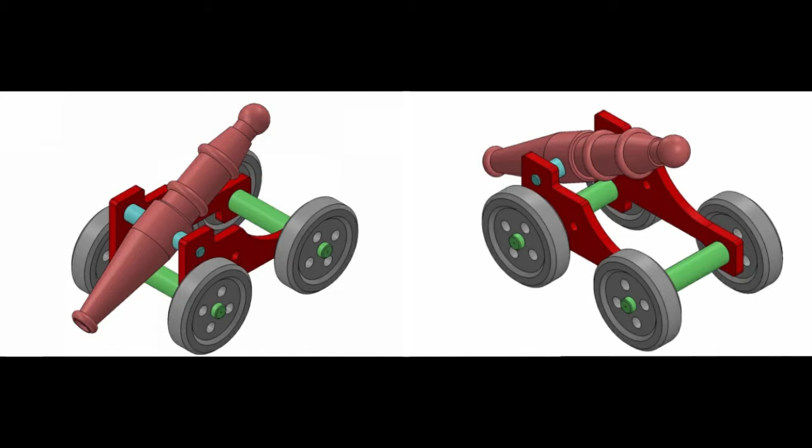In this video tutorial, we're going to be recreating this mortar with wheel plate from cadexpert.com to Solidworks 2013. This is actually divided into 5 parts. Here are the parts, I'm going to flash it to the screen.

We're going to be doing each part one at a time, and once we've completed all the parts we need, we're going to assemble it into a mortar with wheel.

So first thing is I'm going to open a new Solidworks document, and then I'm going to change the unit to millimeter since that's the unit we're going to be using in this plate.

Now I'm going to sketch a 78 diameter circle, and then extrude it by 110 millimeter.

And I'm going to sketch another circle with 82 diameter, and then extrude it by 90 millimeter.

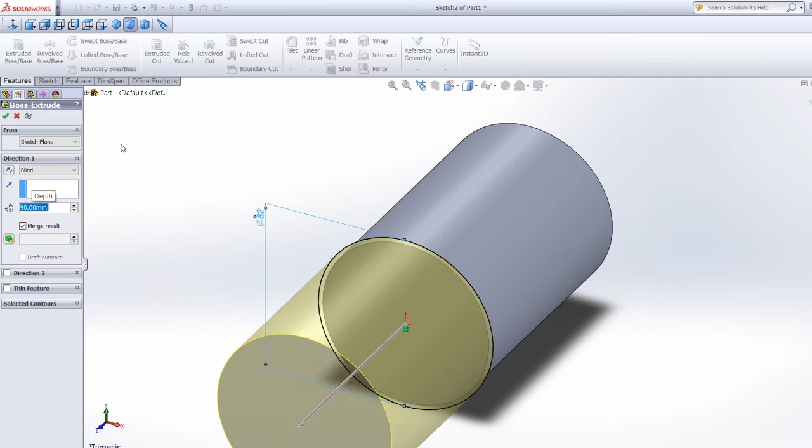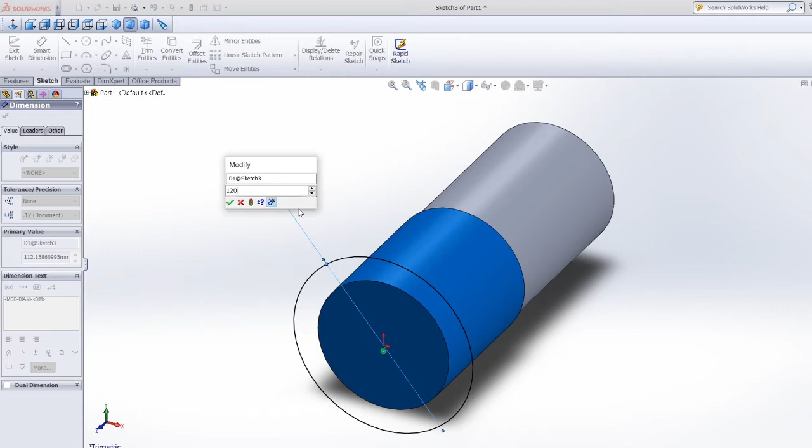Sketch another circle again with 120 diameter, and extrude it by 440 millimeter.

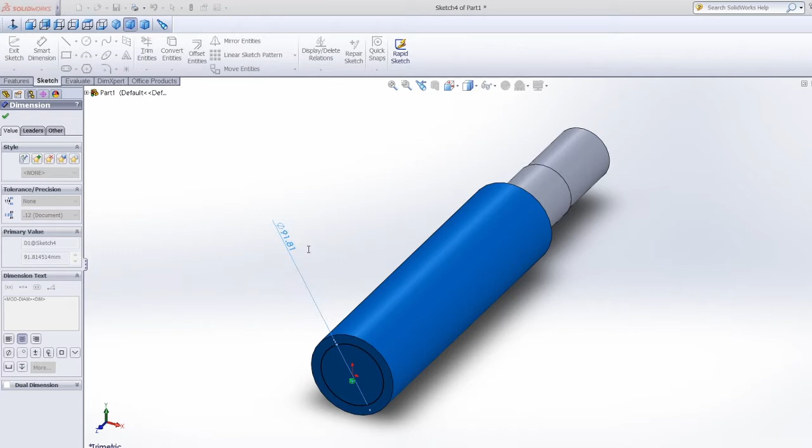Then after that, we're just going to copy what we did on the other side. Make another 82 diameter circle again, and extrude it by 90 millimeter.

And make another 78 diameter circle again, and extrude it by 110 millimeter.

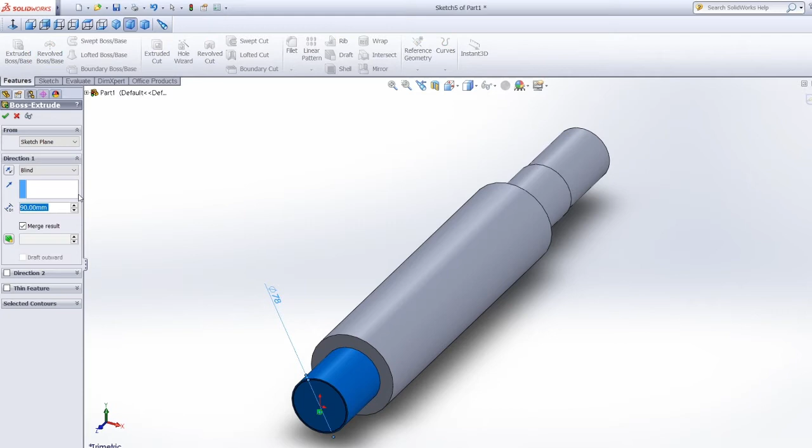Now we're just going to use a chamfer with 5 millimeter distance from both ends of this object.

Then lastly, we're going to sketch a 7.5 diameter circle from both end surfaces of the object, and extrude cut it to 6.25 millimeter.

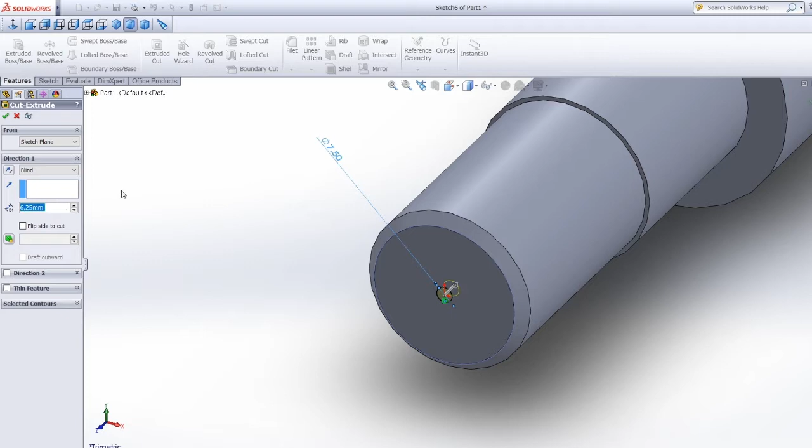Now we just have to change the color of the object so we won't get confused once we assemble it.

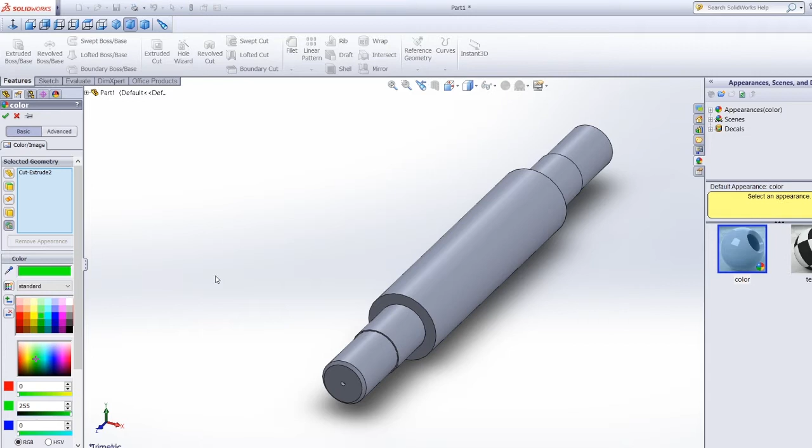Now we're done with the first part. We're just going to save it and use part 1 as the file name, and make sure you use a new folder so it would be less hassle once we start to assemble.

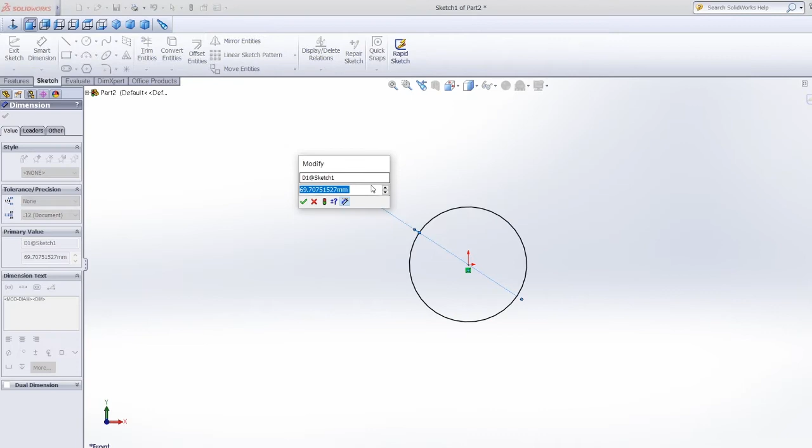Now this is the second part. I'm going to be sketching a 60 diameter circle, and extrude it to 55 millimeter.

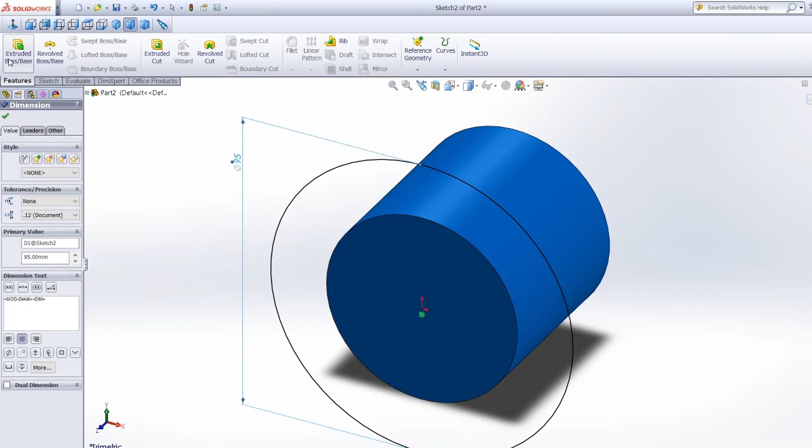And then sketch another circle with 95 diameter, and extrude it by 440 millimeter.

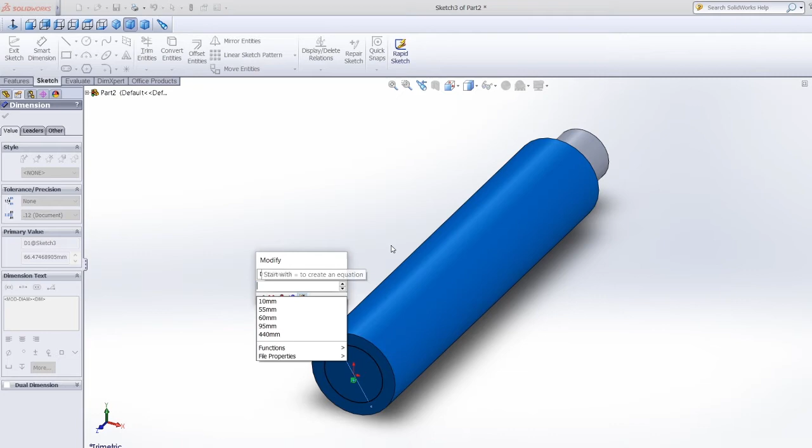And after that, we're just going to copy what we did on the other side again. Make a 60 diameter circle, and extrude it to 55 millimeter.

And we're going to use chamfer again from both ends of the object with 5 millimeter distance.

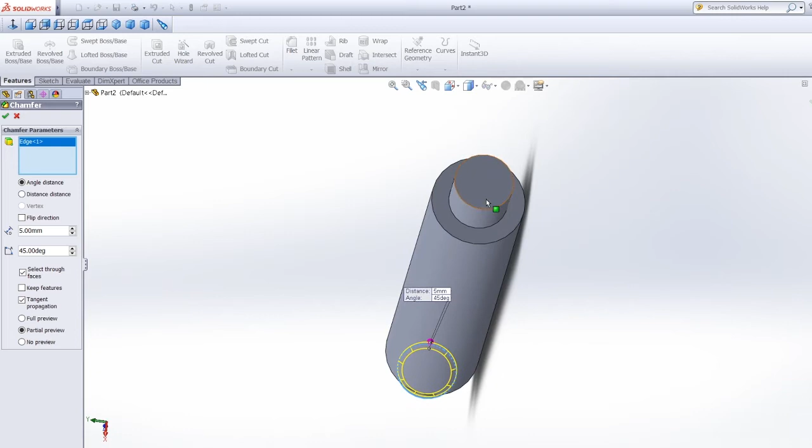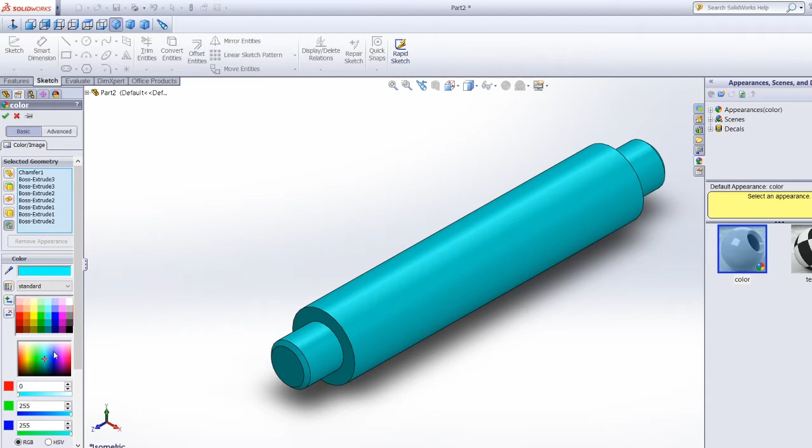And now we're pretty much done with the second part. All we have to do is change the color again, and save it under the file name part 2.

Now this is the third part. Let's start by sketching a 200 millimeter line.

And then a 200 millimeter line again downward, and another 200 millimeter line again from right to left, and then a 100 millimeter line upward.

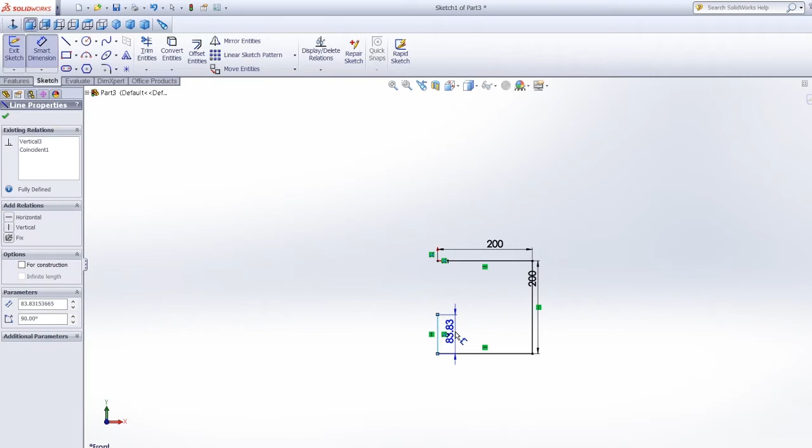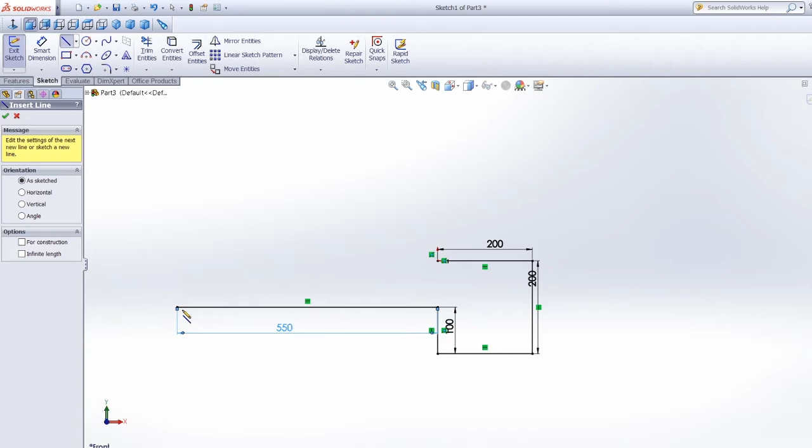Then from this point, make a 550 millimeter line leftward, and then from your end point here, make a 100 millimeter line downward.

Then make a 200 millimeter line again leftward. From your end point here, make a 500 millimeter line upward.

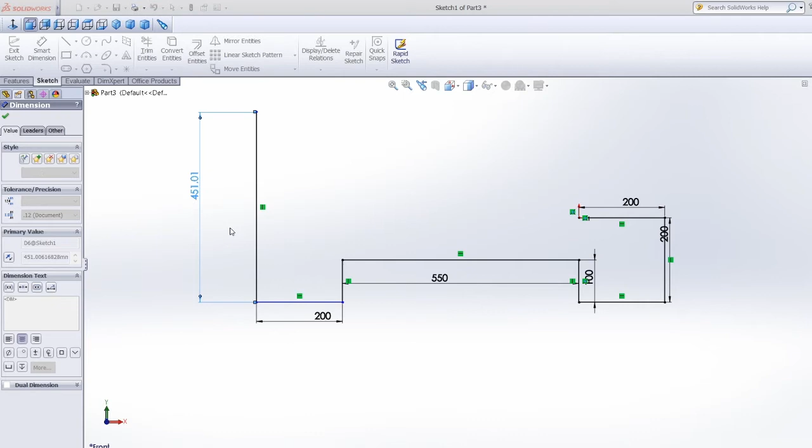Then from here, we just have to copy the measurement we used on the lower part, and from this point, make another 200 millimeter line again rightward.

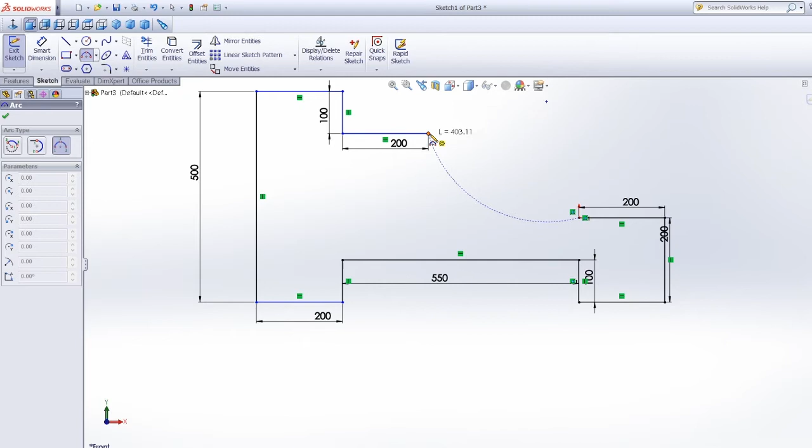And then I'm going to be using a tangent arc, 3-point arc rather. And then with smart dimension, I'm going to put the radius into 380.

Now we're going to locate the center of this part, and we're going to make an 80 diameter circle, and also a 60 diameter circle from the center here, and also another 80 diameter circle in this center.

Now we're going to draw a 150 millimeter line from here upward, and a 250 millimeter line leftward.

Then from this endpoint, I'm going to sketch a 50 diameter circle. Then I'm just going to delete these measurements.

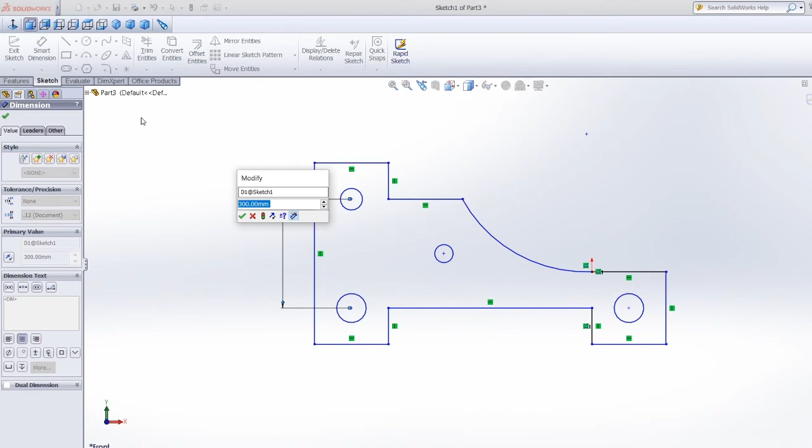Now to check if we have the proper measurement, the distance from this 80 diameter circle to this 60 diameter circle is 300. Then from both, this 80 diameter circle is 750. So we had both distances right.

Now we're going to extrude it, and we're going to extrude it by 50 millimeter.

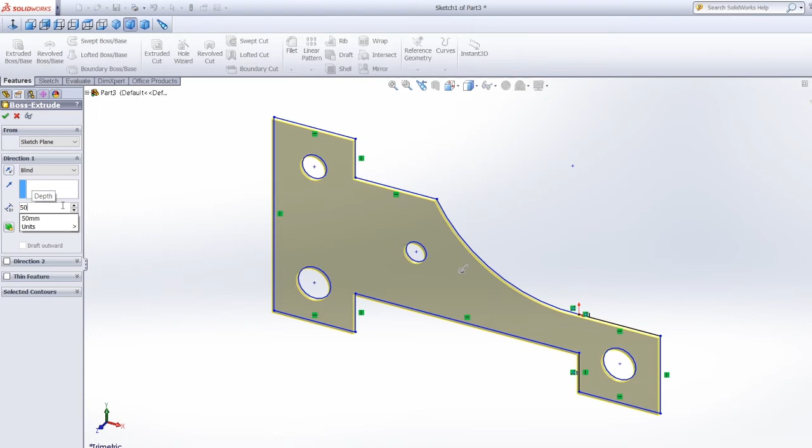Now we're going to use fillet with 20 millimeter radius, and we're going to apply it to all the sides.

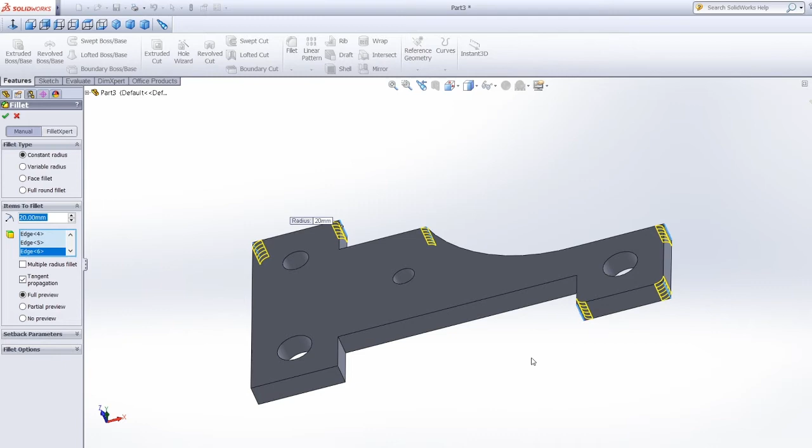Then another fillet with 40 millimeter radius, apply it to both these sides.

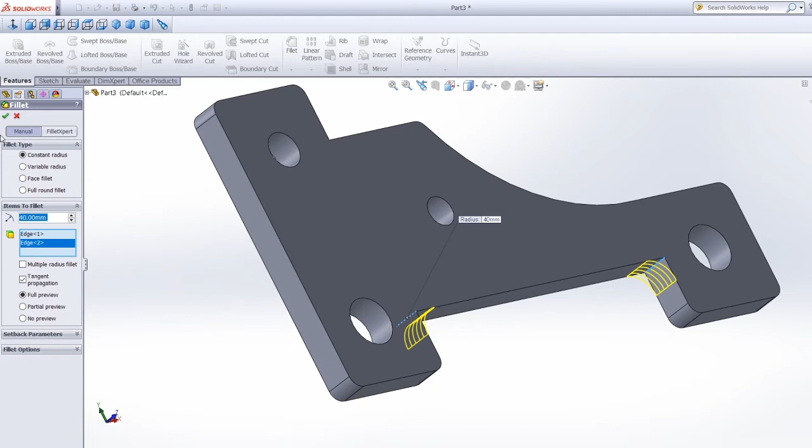Now change the color appearance, and we're done. Save it under the file name part 3.

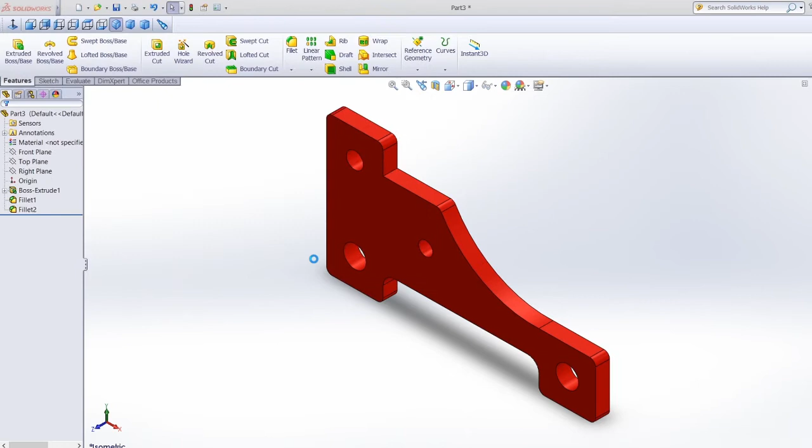Now this is the fourth part. I'm going to start by sketching a 500 diameter circle, and extrude it to 130 millimeter.

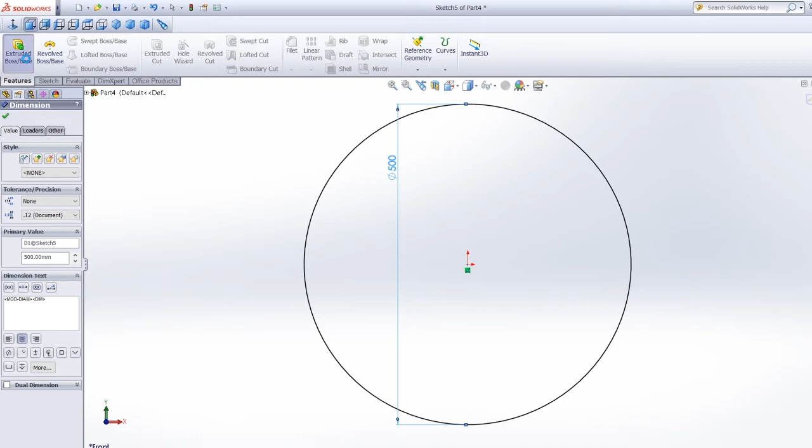After that, we're going to use chamfer with 20 millimeter distance and 45-degree angle from both the front and the back surface.

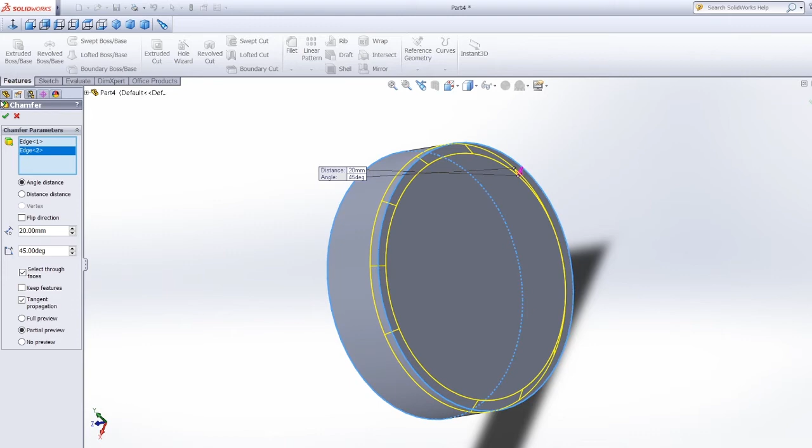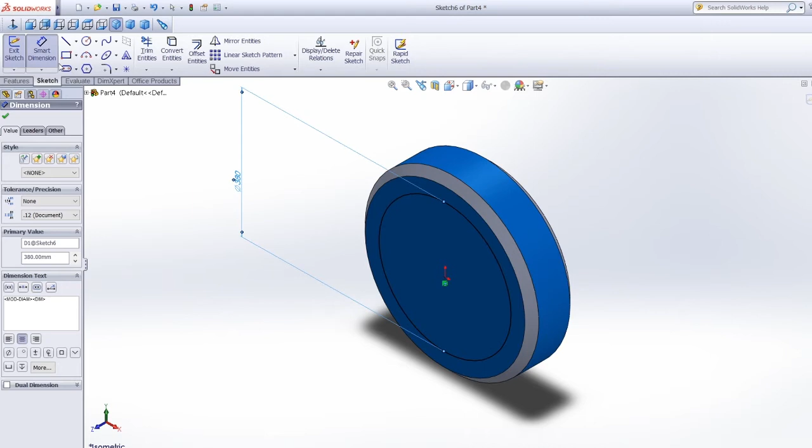And now going back to the front side, we're going to sketch a 380 diameter circle here, and then extrude cut it to 20 millimeter.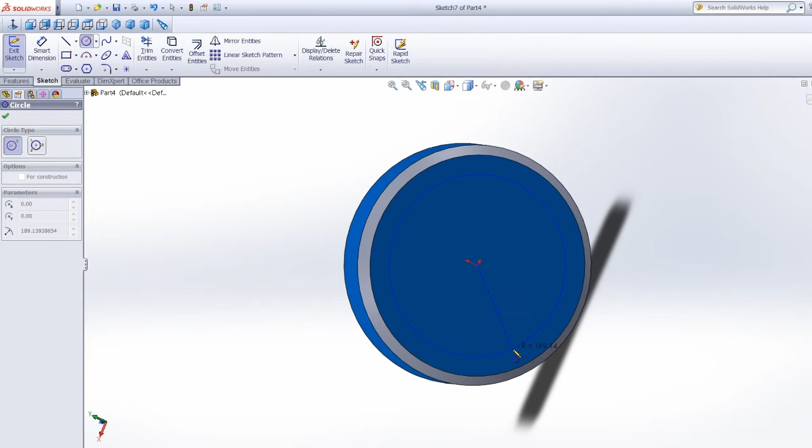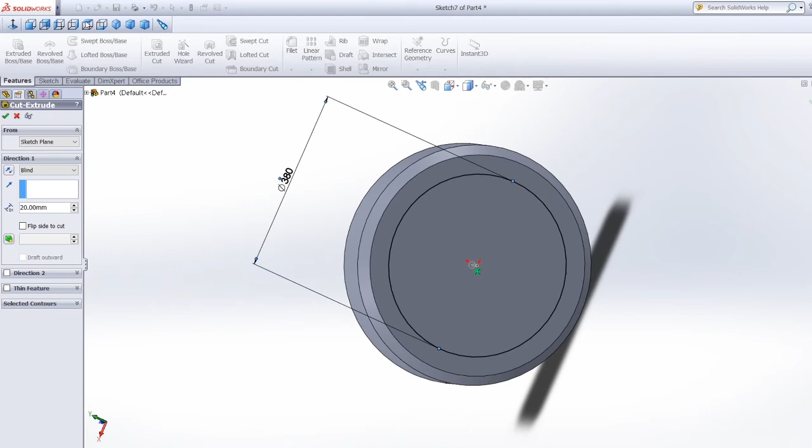Then we're just going to do the same thing here at the back. Now use chamfer again with 20 millimeter distance and 45-degree angle from both the front and the back.

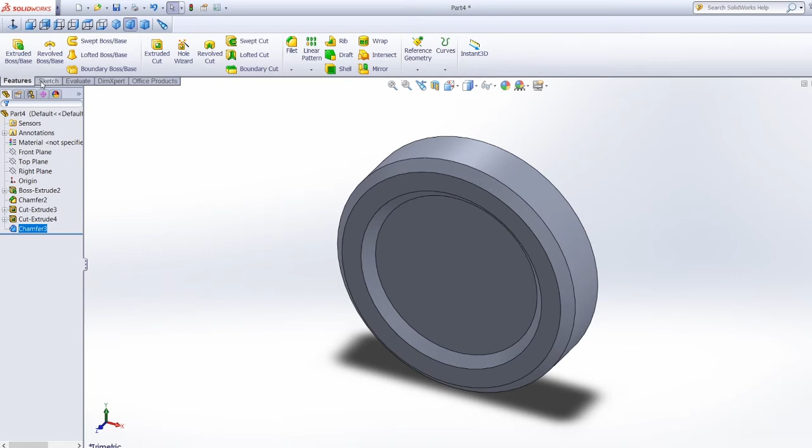Then from the front view, we're going to sketch a 200 diameter circle, and from the center, make a line and connect it to the right endpoint.

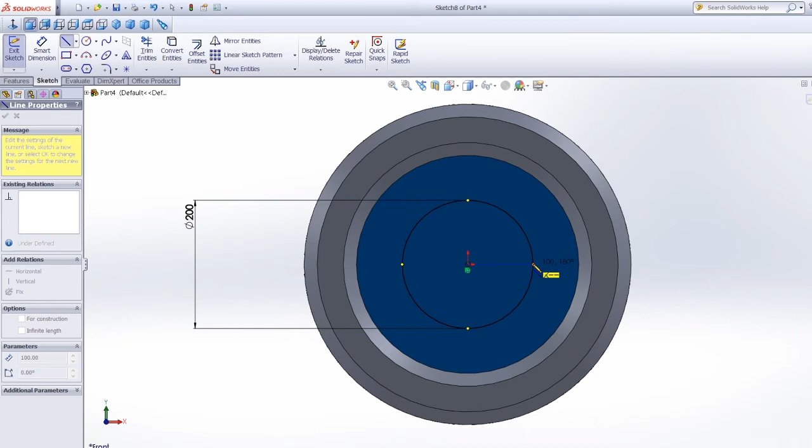Then after that, click the arrow button beside the linear sketch pattern and make it a circular sketch pattern, and then change the number of instances to 4.

And then start sketching circles using the lines as the reference. After that, click the circles that you've made.

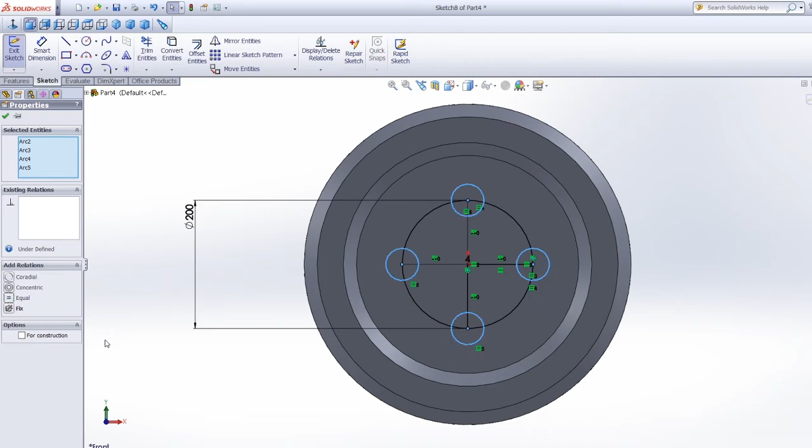And click this equal button, then use Smart Dimension to fix the diameter to 62 mm.

Then I'm just going to delete all these guidelines that I've used, and I'm going to sketch a 78 diameter circle here at the center.

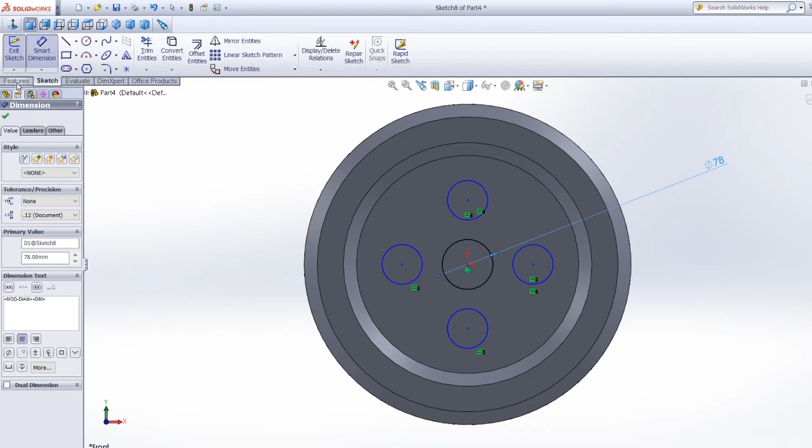Then lastly, we're going to extrude cut it by 90 mm.

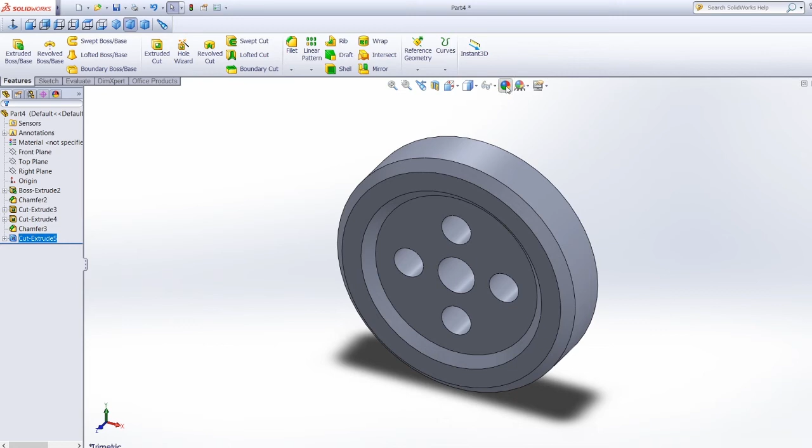Now change the color appearance. And save it under the file name Part 4.

Now this is the last part we're going to be doing before assembling it. I'm going to start by sketching a 1390 mm line. This would serve as our baseline. Then from this point, I'm going to be sketching a 47.50 mm line upward. From here, make a 4 mm line to serve as our distance. Then using that distance, sketch a 55 mm line from the base.

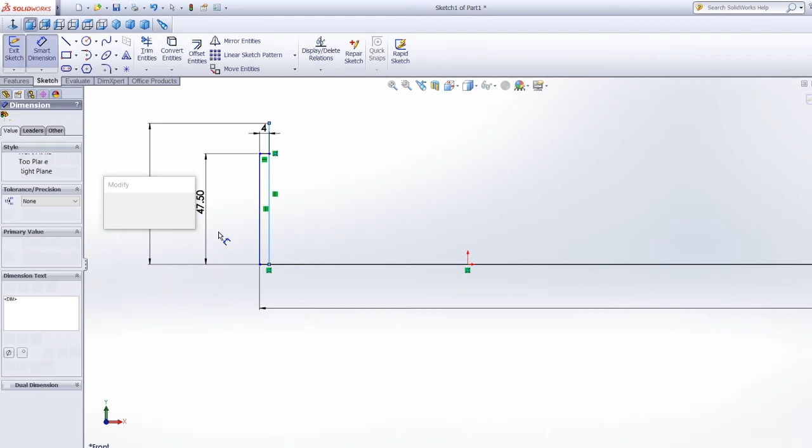By the way, I'm sketching guidelines here on the top instead of the lines at the bottom because I get confused easily. And I purposely did the 1390 mm line first because I just want to make sure that the length of my object is accurate all throughout the process.

Now I'm just going to delete this 4 mm line and replace it with 16 mm. This would serve as our distance when we draw a 32 mm line from the baseline. Now make a line connecting this 47.50 mm line to the 32 mm line.

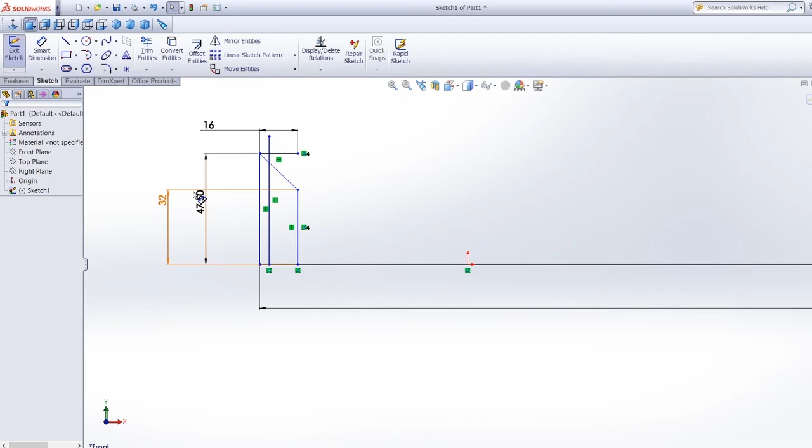I'm just going to delete all this dimension and also trim the lines that are not needed. Then from this point, sketch a tangent arc and fix the radius to 25.

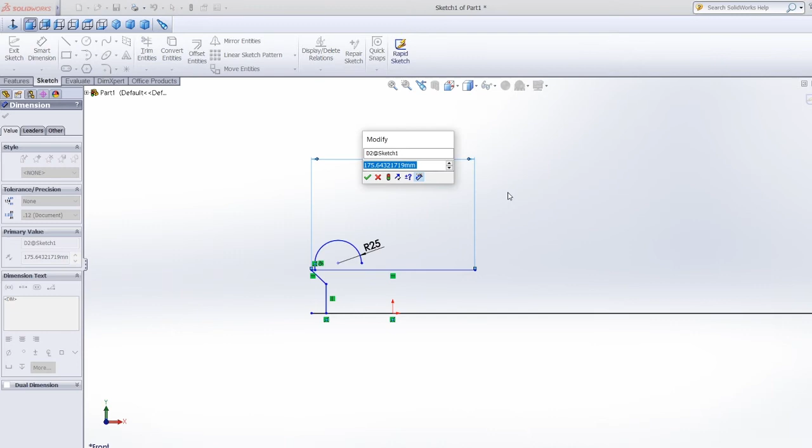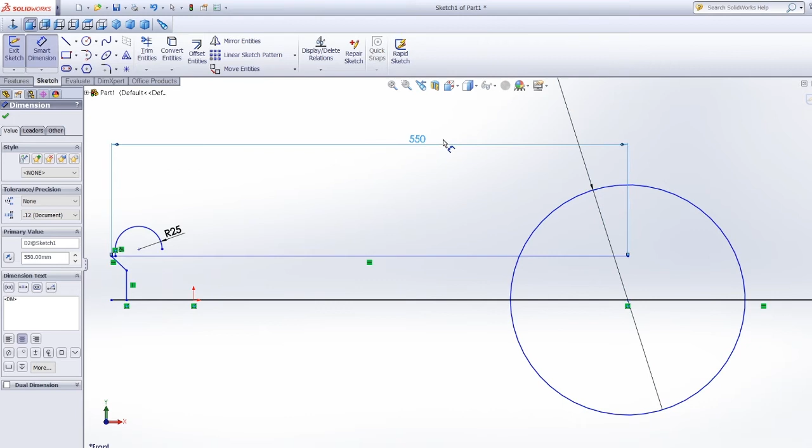Now we're going to make a 550 mm line. This would serve as our distance. Then from the baseline, make a 250 diameter circle. Then we're going to sketch a line connecting this 25 radius arc to this 250 diameter circle. After that, we can delete the circle already.

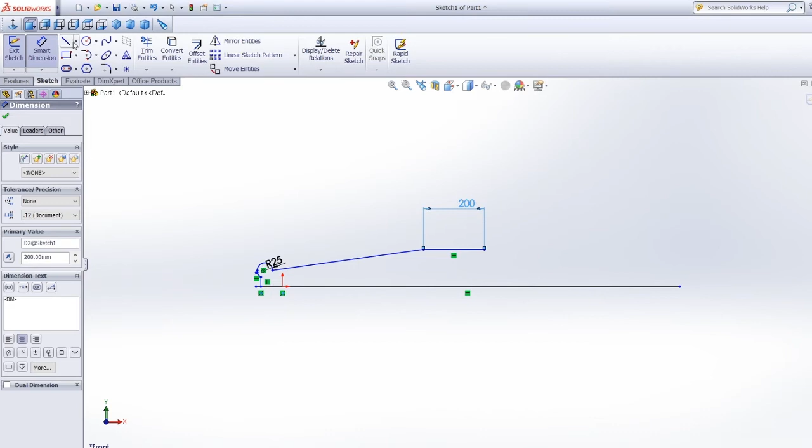Then from this point, make a 200 millimeter line. And a 10 millimeter line downward. Then an 80 millimeter line rightward.

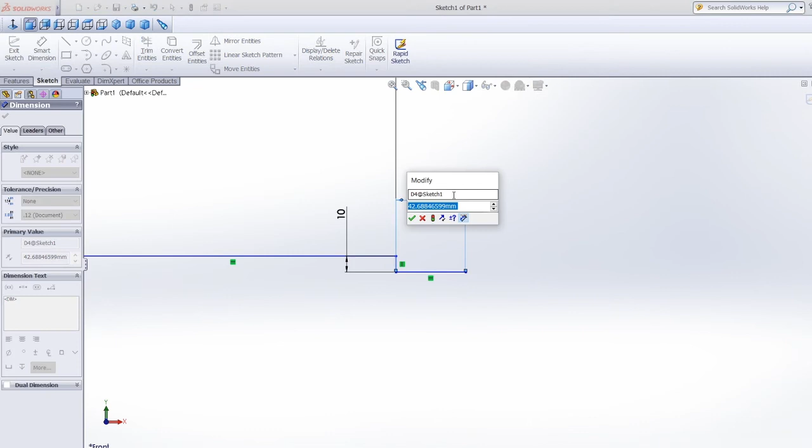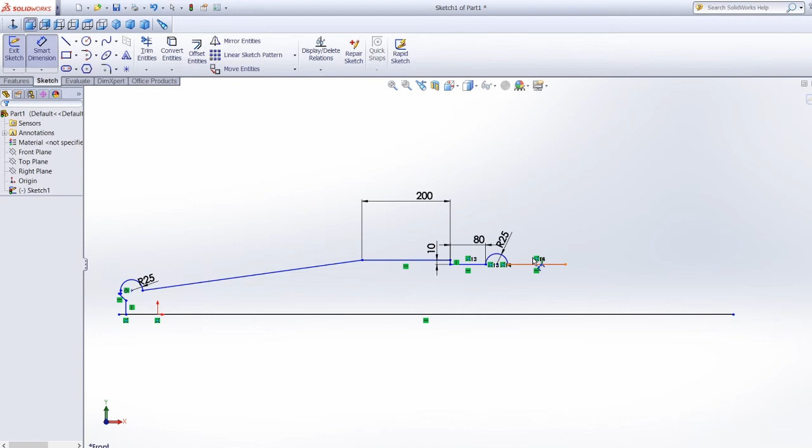Then from this point, sketch a tangent arc and fix the radius to 25. And make a 200 millimeter line. And then tangent arc again with 25mm radius.

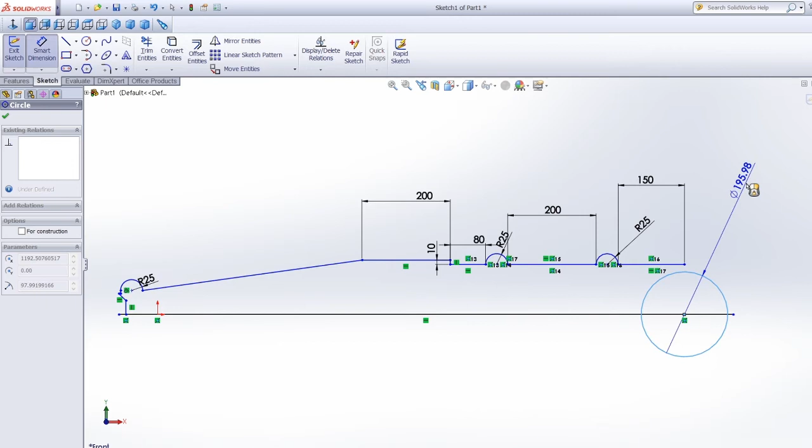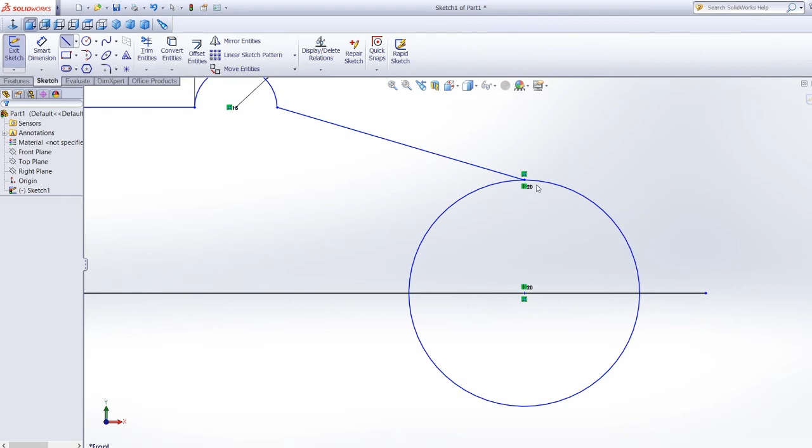Now from here, make a 150mm line. This would serve as our distance to make a 140 diameter circle from our baseline. Now make a line connecting the tangent arc to the 140 diameter circle. Then after that, we can delete the circle already.

And from this endpoint of our baseline, make a 160 diameter circle. And then sketch a 57mm line from here, rightward. And then downward, connecting to the baseline. Now we just have to trim these lines because those are not needed.

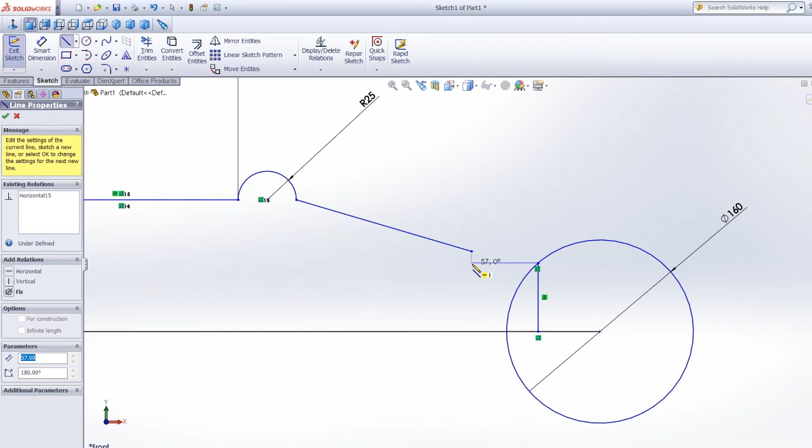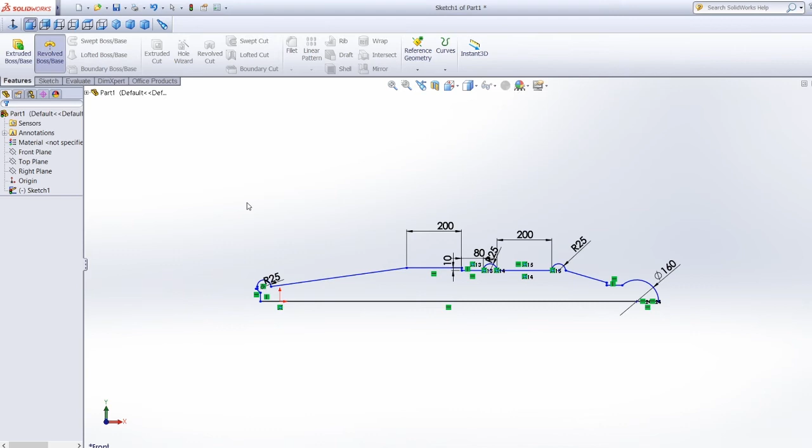And then we will make a line leftward from here and a line upward connecting it to the 150mm line. And then now close the baseline. And then trim the lines that are not needed. Now we're going to revolve it 360 degrees.

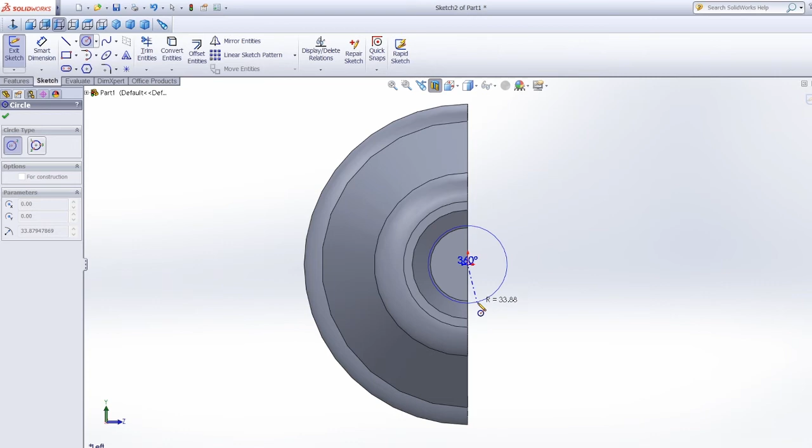Now we just have to change the section view to the front plane so we could see the inside when we apply extruded cut. Now this circle here is already 64 diameter. We're just going to add another circle so we could extrude cut it to 384.

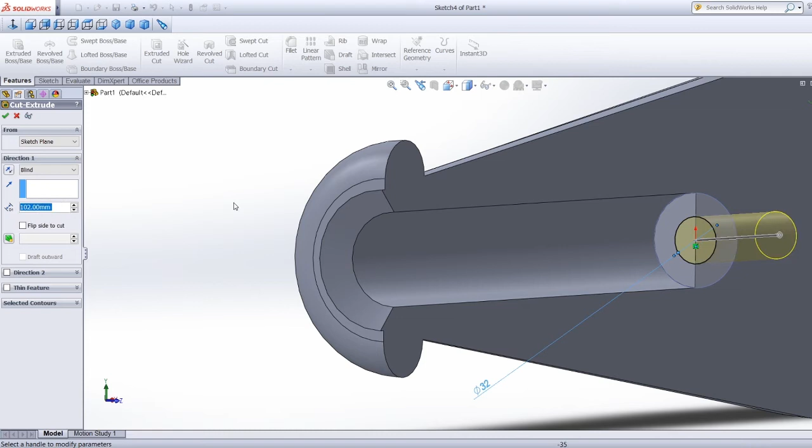Then from here, make a 32 diameter circle. Then extrude cut it to 102mm. Now we're going to apply chamfer with 9mm distance and 45-degree angle from both endpoints of where we extruded.

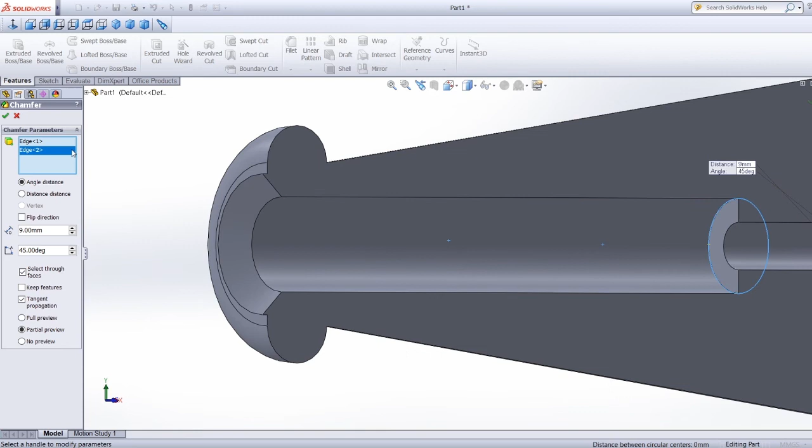Now click the top line on the left and this arrow on the reference geometry option and select point. And then click this part. Now we have a reference point. Now we just have to sketch a 95 diameter circle.

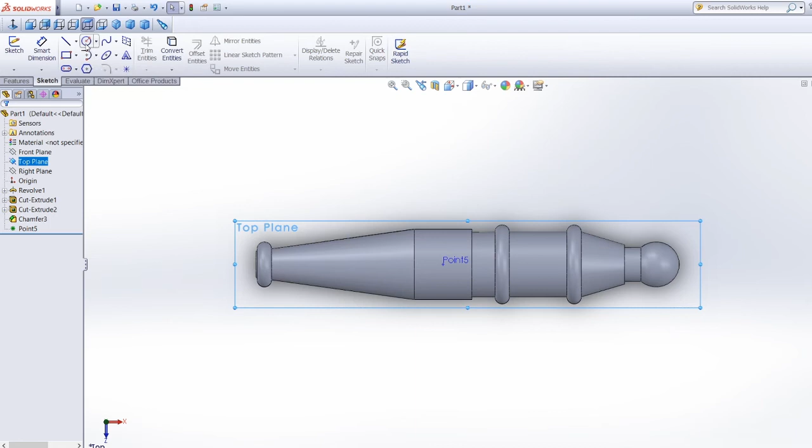And then extrude cut it. But first, change the direction to mid-plane and the distance to 300mm just to surpass the thickness of this object. And there.

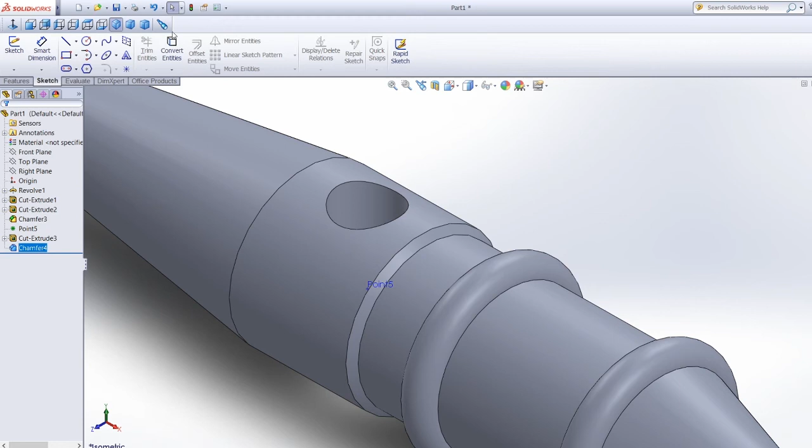Now for the last thing, use a chamfer here with 10mm distance and 45-degree angle. Now we're done with the last part. We just have to change the color and then save it under the file name Part 5.

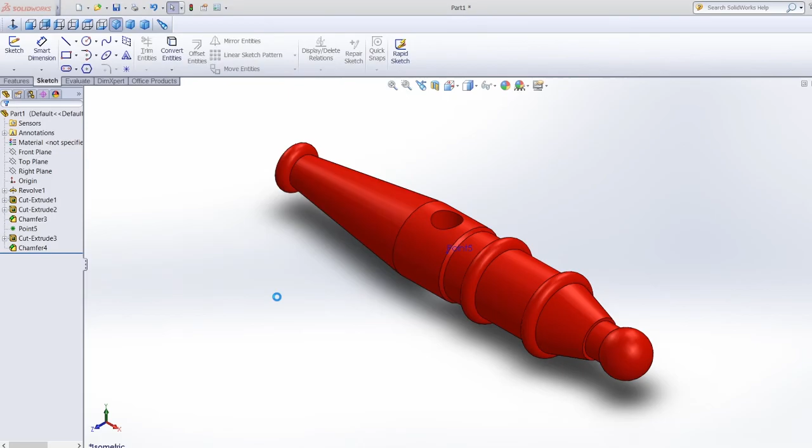Let's assemble all the parts we made. Click New, then go to Assembly. You will be automatically requested to insert a component. The first component we will insert is the body of our mortar. You can click on View Origins so you can see the origins of every part.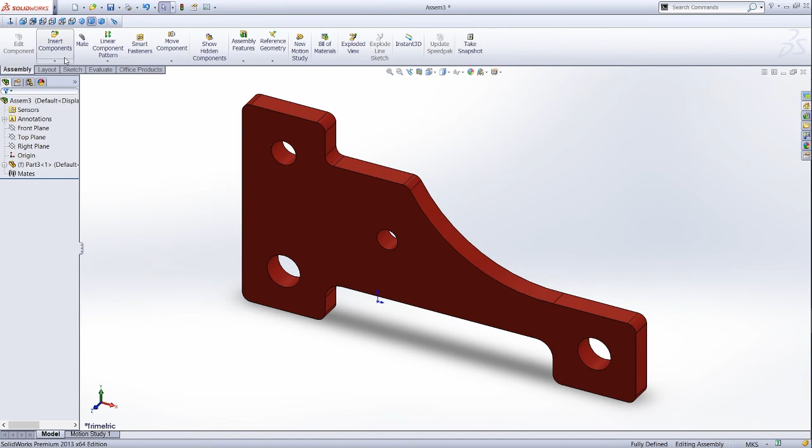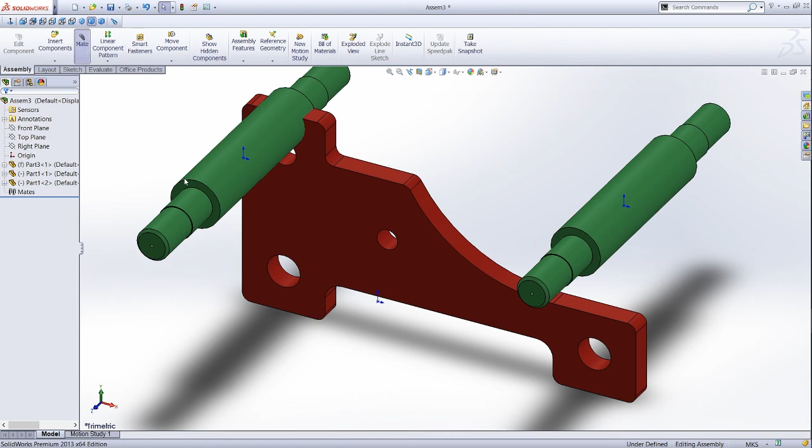Next, select Insert Component and add the pin for the lower part of the body. To duplicate objects, just hold Ctrl, then drag the object away from the original one. Next, click Mate, then click this face and the body's right face so that it will coincide. Click Check, then mate the body's lower hole and the pin's left arm. Repeat what we just did for the other pin.

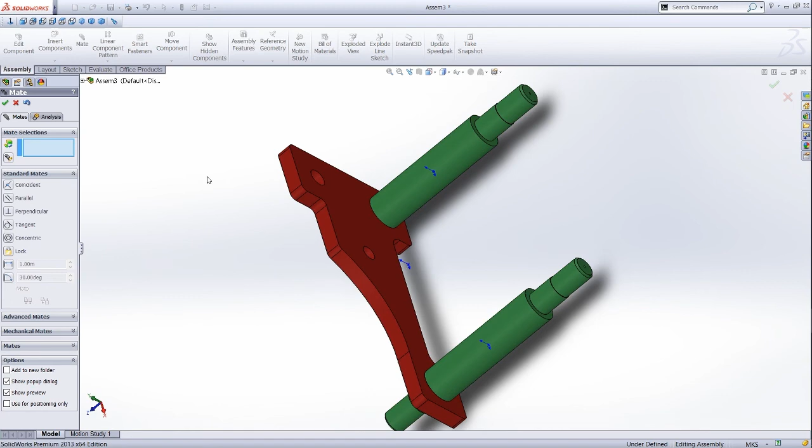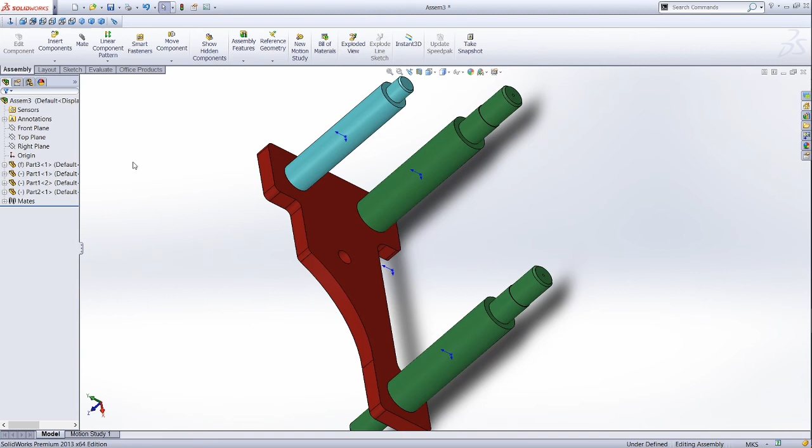Now let's insert the upper pin for the body. Repeat the mate steps we just did earlier. Then duplicate the body and mate it to one of the pins.

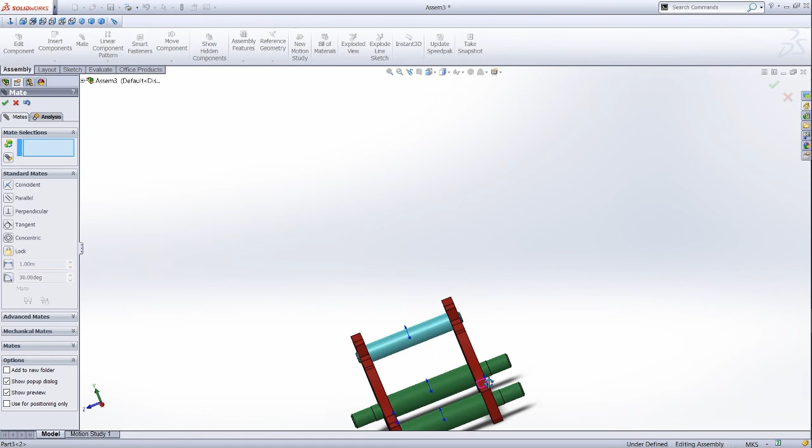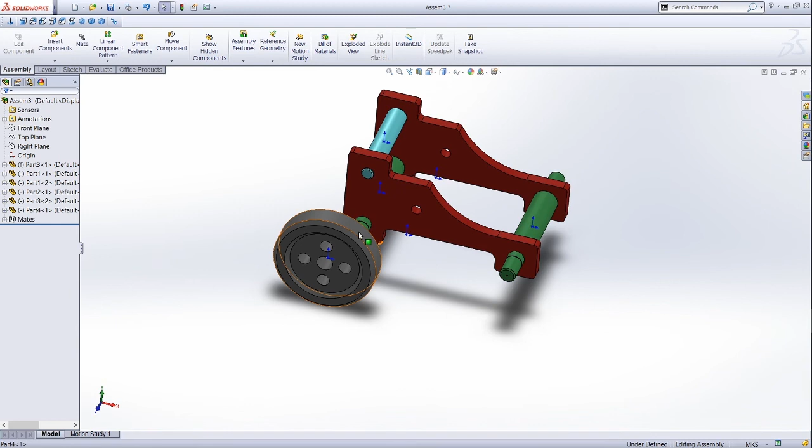Next, we will insert the wheels of our mortar. Duplicate 3 more wheels so you will have 4 wheels. Mate all the wheels to the pins.

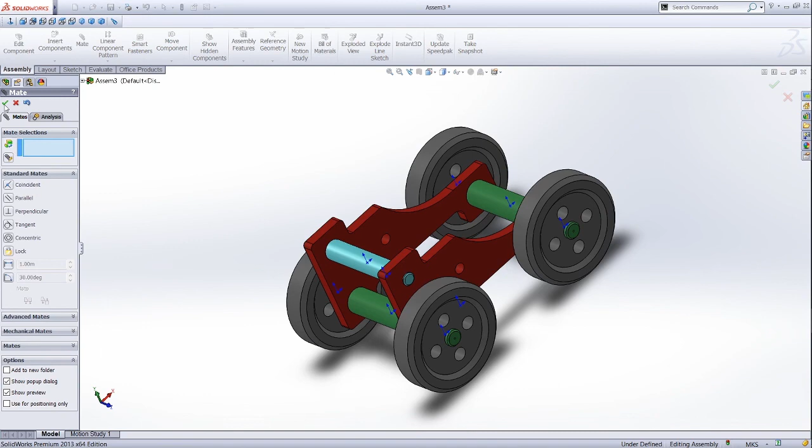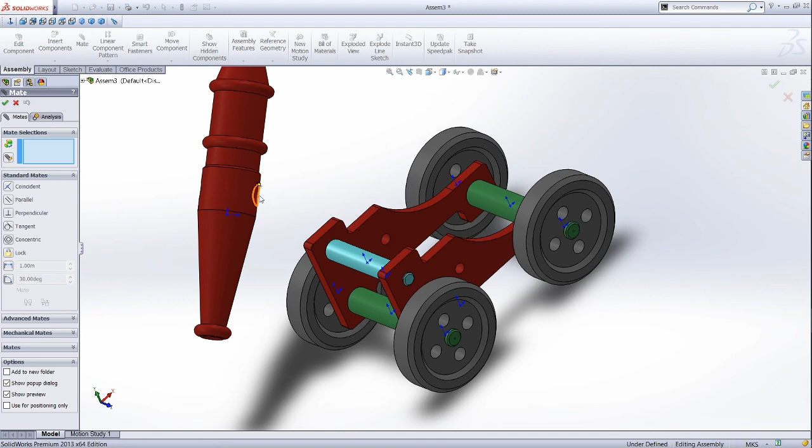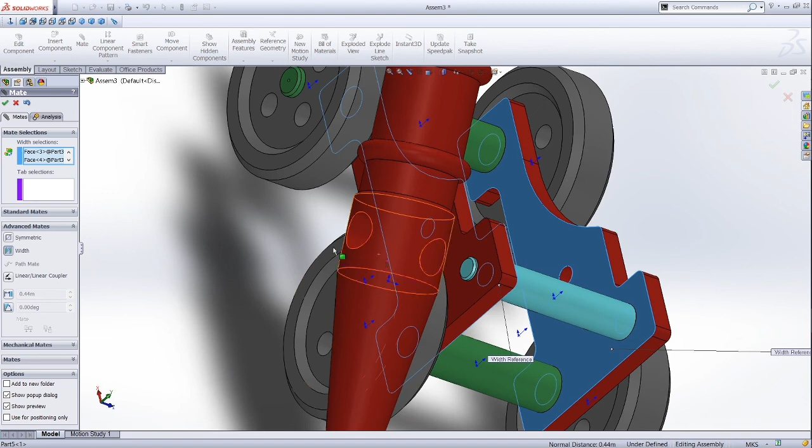For the last part, insert the mortar. Mate the mortar's hole to the upper pin. In order for us to insert the mortar inside the pin, we must use Advanced Mate, then click Width Mate. For the width selection, click the 2 inner faces of the body, and for the tab selection, click the face of the mortar where the hole is located. Then it's done.